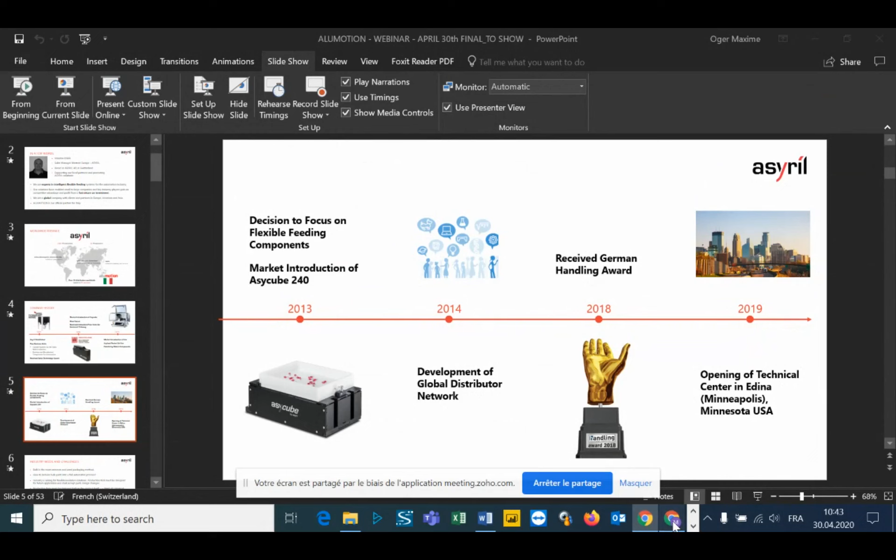Okay, Maxime, let's translate a little bit. One moment. Claudio, raise your hand. Claudio, devi dire qualcosa di importante? No. Quindi, una breve traduzione.

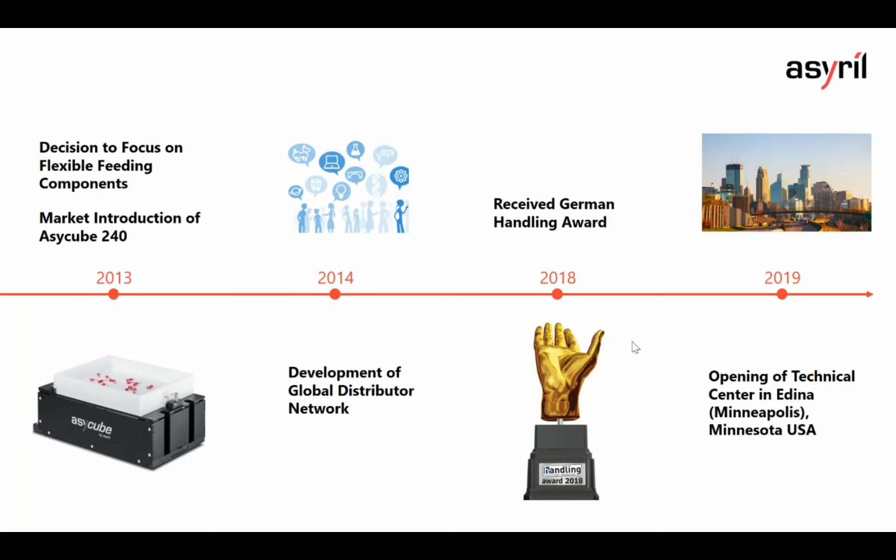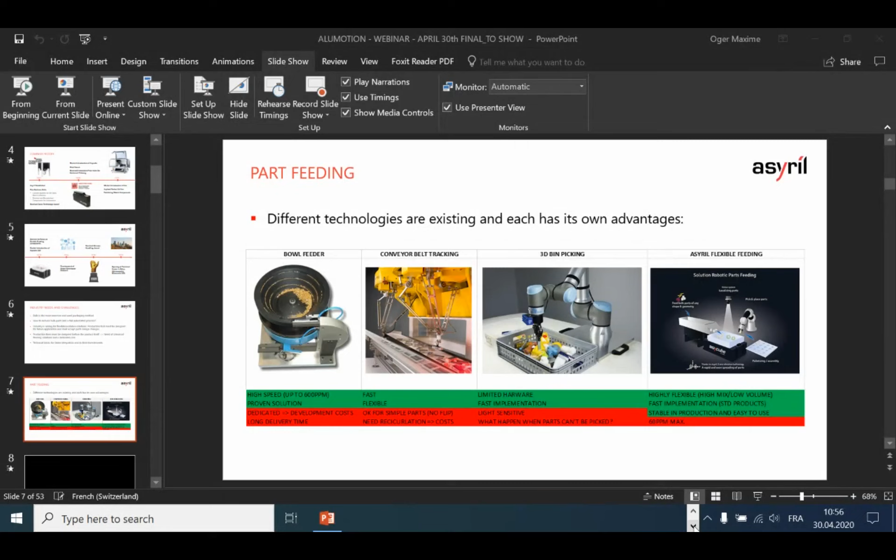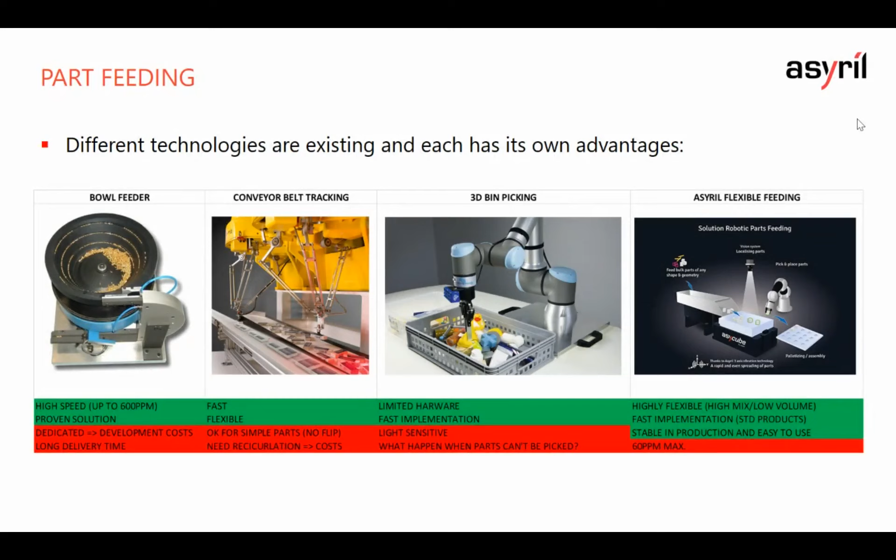So we'll continue with a video showing exactly how it's working. We can see here that's with a SCARA from Yamaha. We have an Asycube 240 with the vision system from Yamaha in this case. That's a demo built by Yamaha, which will be better now.

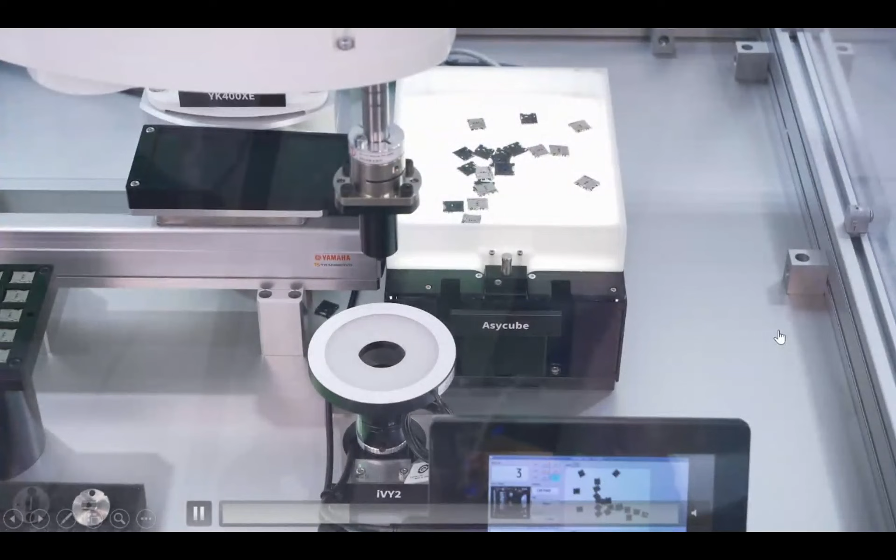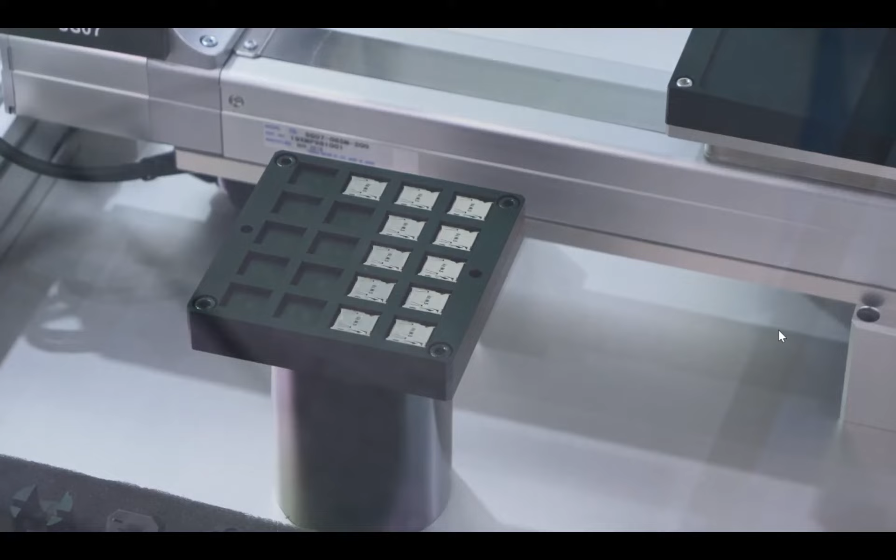So you can see the demo is showing how to feed electronic parts. That's basically SIM card sockets in this case, not so easy to feed with a traditional system. As you can see in this video, we can reach up to 45 to 50 parts per minute, but I think we can be a bit faster with some optimizations. There's always a possibility to put a second Asycube with one robot, so we're having two feeding systems with one robot. This way the robot never waits on the feeder, and this can help reach a much higher cycle time.

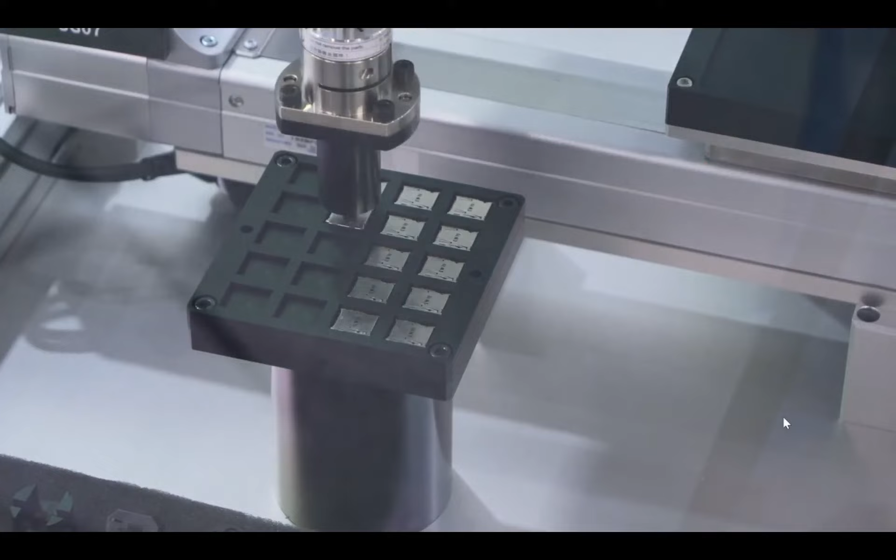So the question is, why do you need flexible feeding, and when do you need flexible feeding? As I was mentioning in the previous slide, high mix, low volume, and frequent production changes. If you need high flexibility, this is where, most of the time, we get requests.

The thing is, if you have low volume, most of the time people think, since I have low volume, I cannot afford an investment to do automation. But what if I don't think about only one assembly, but regroup 10, 20, 30, 40 assemblies with low volumes? I can get big volumes in the end. I just need the tool, the production tool, that allows me to produce all those references. So this is where we are most of the time used, for flexibility, definitely.

Fragile parts to be fed. If you have fragile parts, parts that don't like friction, don't like recirculation, don't like to fall down, parts where no scratches are allowed. I'm thinking about some projects, requests we had from the aerospace industries with electronic components, which at the end of production must be really clean and cannot have any scratches. So our system in this case can handle the parts very gently.

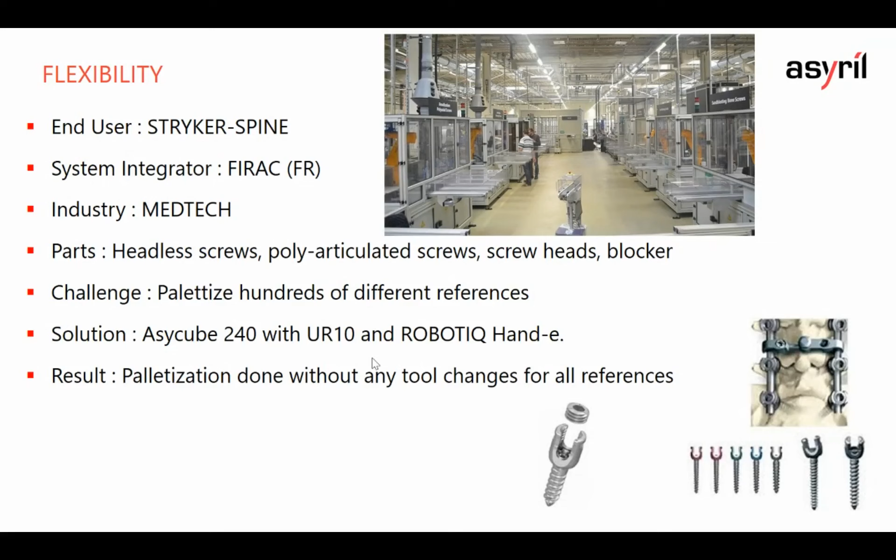Our target was to feed the parts directly after the CNC machine, put them into pallets, and allow the AGV to run the fully automated process afterwards. So we answered by providing an Asycube 240, using the UR10 and a ROBOTIQ Hand-e gripper. The result is palletization done without any tool change for all the references. We were able to do the pick and place and palletization of the 200, 300 references without any tooling change, just loading the software recipe.

Just to give you a better view, I will launch the video.

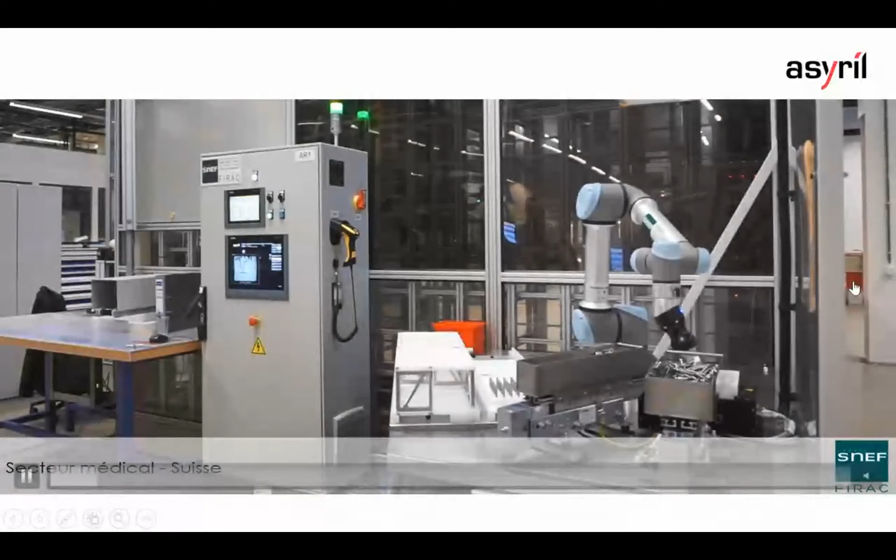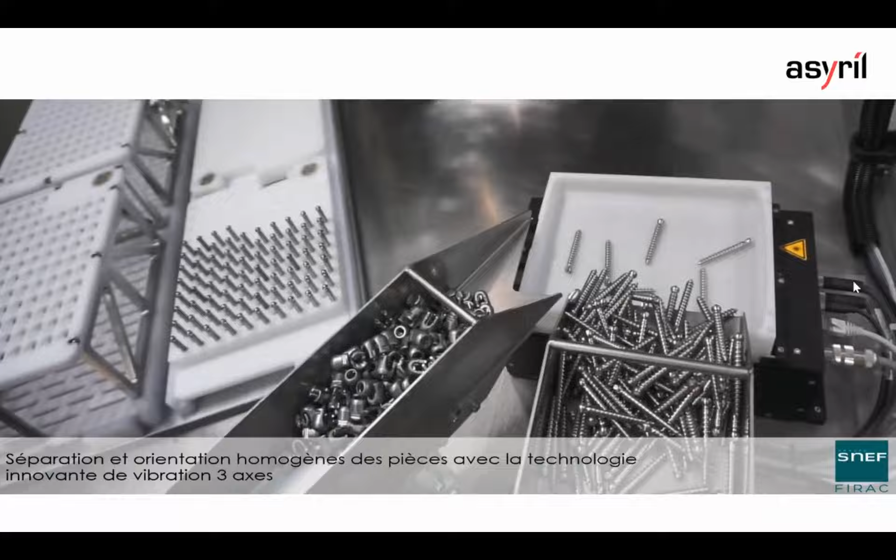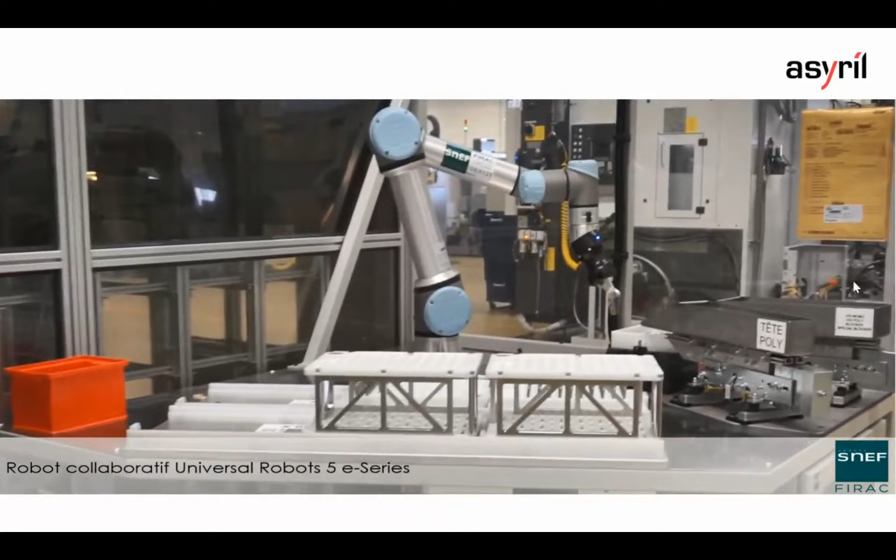The cell was made to be fully open, in the middle of the factory. This is something they wanted, to show to their potential customers. You can see the pallets here, we take the screw without any head, and there's the head on another feeder to make the palletization also for this. So the biggest challenge here was really to find a tool that allows customers not to have 200 different toolings to develop and stock, just one cell that can do everything. This is what we managed to achieve with the collaboration of the system integrator.

Another example of flexibility: the end user is a US customer providing electronic components. The system integrator is in Switzerland, called AATEC, and they are focused on developing machines for tape and reel applications. In this case, the end customer must provide tapes with many references of microchips from 0.3 to 10 millimeters in size, so very small components to be placed into tapes.

So we provided the customer with free of charge feasibility studies at first, to determine if it was possible to feed the full range and detect all the details on the parts, and to answer his request. The Asycube 80 was the ideal solution for this, with SmartSight, our integrated vision system, using Jenny-Science Cartesian robots.

The result is we are here in the low volume high mix category. The machine successfully addresses the wishes of the end user because we provide one machine that can handle hundreds of different references, so for him the investment is much less. That's definitely the big point for him.

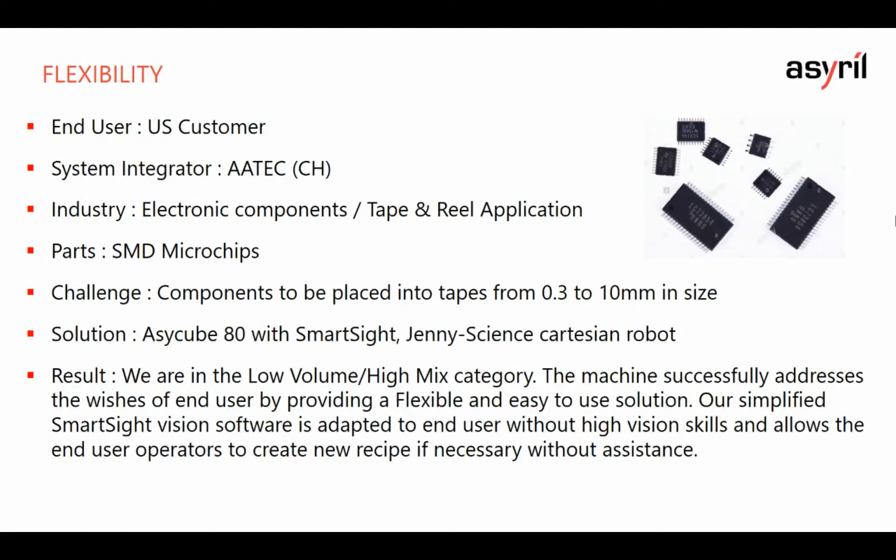So this is quite unique in the market, in feeding those parts. Most people think it is easy, but if you go to very small parts, you face different challenges compared to big parts. So we have definitely the experience to feed such small parts, and we know how to help them.

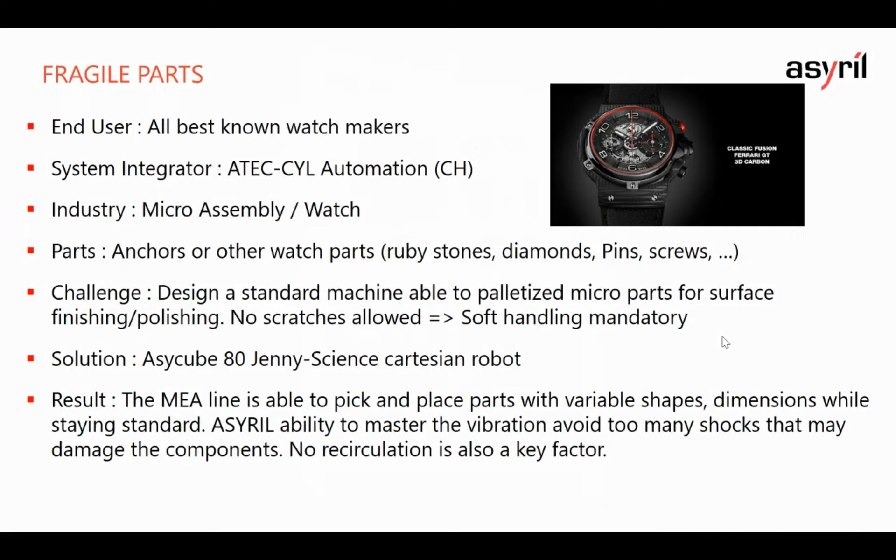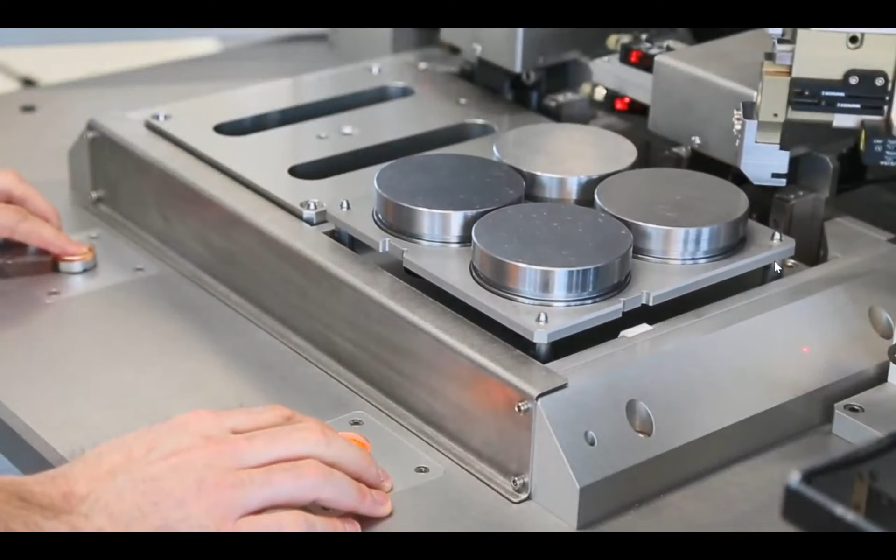So this is the full machine. If you see the metallic disc here, this is where the parts will be placed. We have some glue here, so the parts can stay very fixed on the disc. The vision system detects the orientation, gives permission to the robot, and of course we do the pick and place.

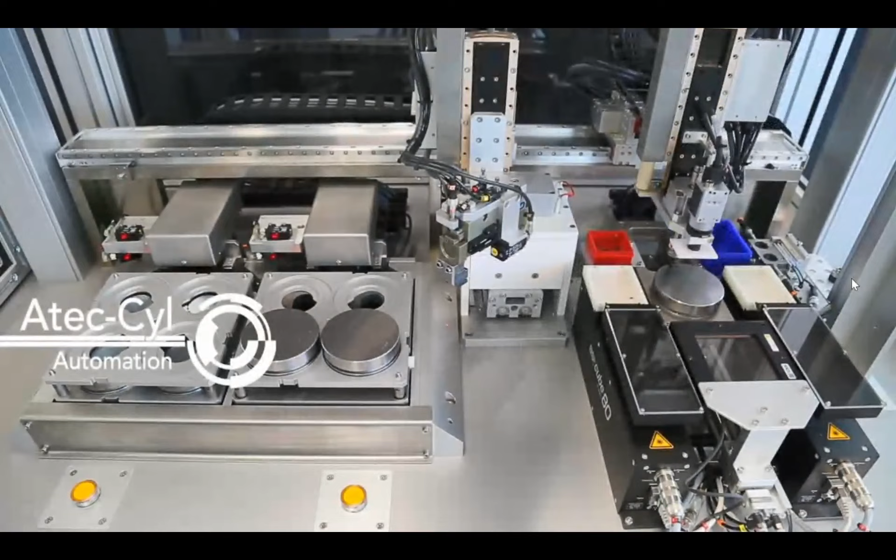So the next example is parts stuck in a bowl or into a rail. I take an example here from an end customer in the medtech industry, a major American company. The system integrator was IMA Medtech, based in Switzerland, but the headquarters of IMA is in Bologna, Italy. The industry, of course, is medtech. The parts are one part of an auto-injector.

Auto-injector is also a big boom in the medtech industry, with a lot of production change over the life of the product. The challenge here was one part of the auto-injector was adding soft touch overmolding, and this soft touch is not compatible with a bowl feeder or a linear conveyor.

The experience of the end customer in this case was, no, we don't want to use bowl feeders because we know we had some troubles in the past. So we need to find another solution to feed because we know there will be problems.

The other challenge was this line was designed first for manual assembly, but almost at the end of the project, the customer came back and said, finally we want to put robots and do automation on this part. So you need to put a robot, a feeding system, and a vision system into this area.

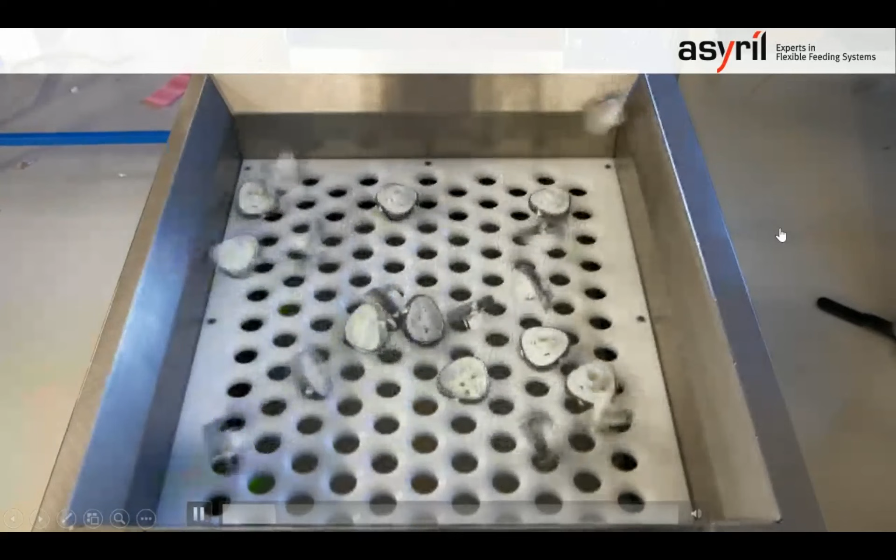So this was the parts. This is the specific plate we designed on the Asycube 530, which is our biggest feeder. As you can see, we designed the plate with holes that will trap the parts in the correct orientation, so we can see a number of good parts after each vibration. We take them, give the coordinates to the robot, then the robot gives the information that it's done and gives the order to the Asycube to set up a new vibration sequence.

Okay, this is quite unique.

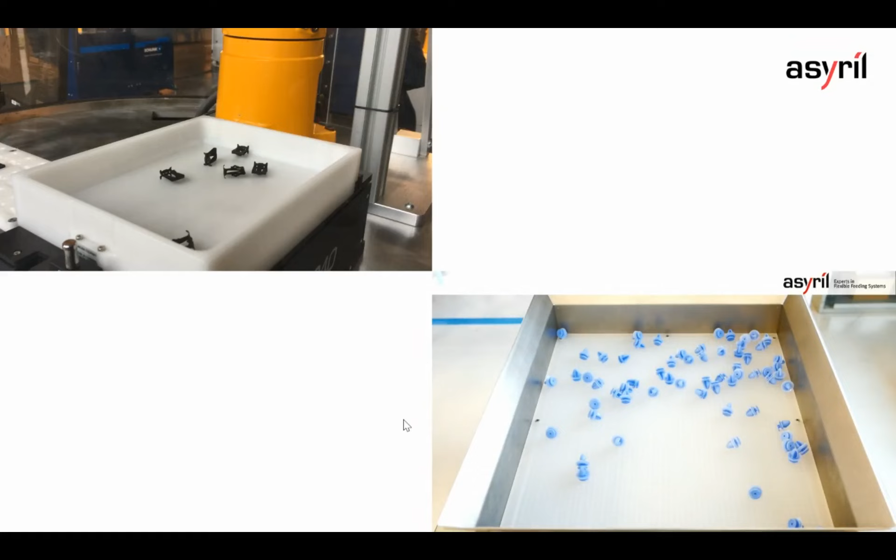But there is another option: using the 6-axis robot to pick directly into the Asycube, which makes the cycle time much more comfortable. You can see we can feed those clips easily. They call it a Christmas tree because it looks a bit like one, and it doesn't look very complex as a part, but it really caused most of the industry a lot of problems.

Questo invece viene da un altro ambiente che è quello dell'automotive. Immagino che li abbiate già visti, queste sono delle specie di spine plastiche che hanno diverse forme. Il caso era quello che c'è una macchina o una pressa a iniezione che produce queste cose e poi subito dopo c'era il montaggio eseguito a mano.

Se il montaggio aveva dei fermi, ovviamente la macchina doveva fermarsi. Allora hanno pensato di fare un buffer, ma per fare il buffer dovevano in qualche modo andare a mettere le parti in modo regolare, cioè creare dei pallet. Questo è stato fatto con l'utilizzo di un vibratore Asycube. Vedete che le parti sono di differenti tipi: in alto a sinistra una parte metallica, in basso a destra una parte plastica.

Si è utilizzato lo stesso tipo di vibratore con dei piatti differenti. Vedremo a breve che uno dei punti vincenti è quello di poter creare dei piatti ad hoc per i diversi tipi di componenti, per adattare meglio la superficie al tipo di componente. Un'altra cosa da notare è che Asyril si è interfacciato con Universal Robot, con degli SCARA, con uno SCARA di Yamaha, in questo caso con uno Stäubli: è una piattaforma aperta a diversi tipi di robot brand.

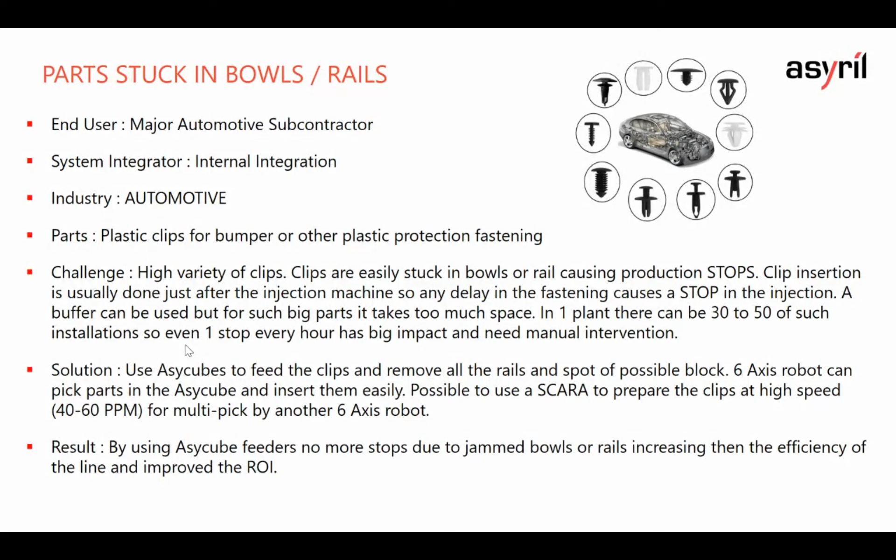They decided to go with Asyril and also Universal Robots in this case. The good thing for them is they managed to integrate our feeders with the Universal Robots in less than one week. Just an 8-people company, very small, managed to do this in one week without really big experience in robotics. I'll show you the video right away.

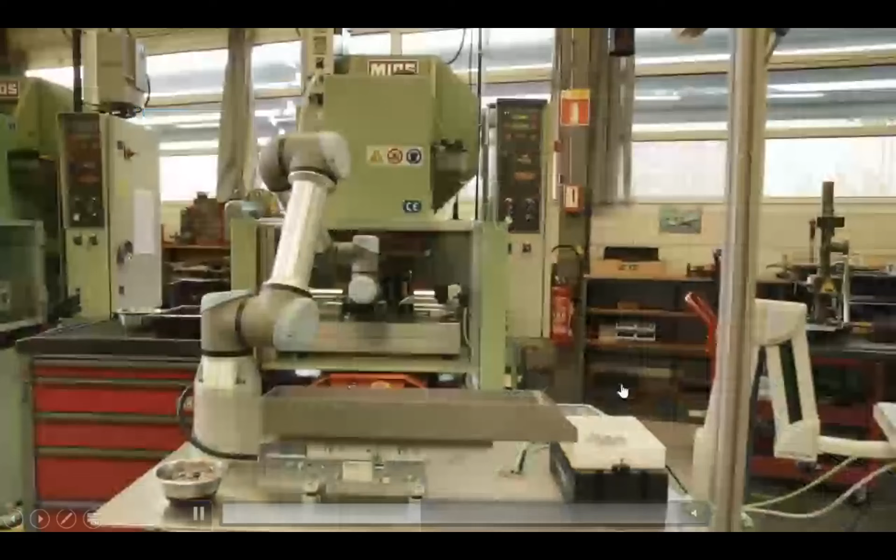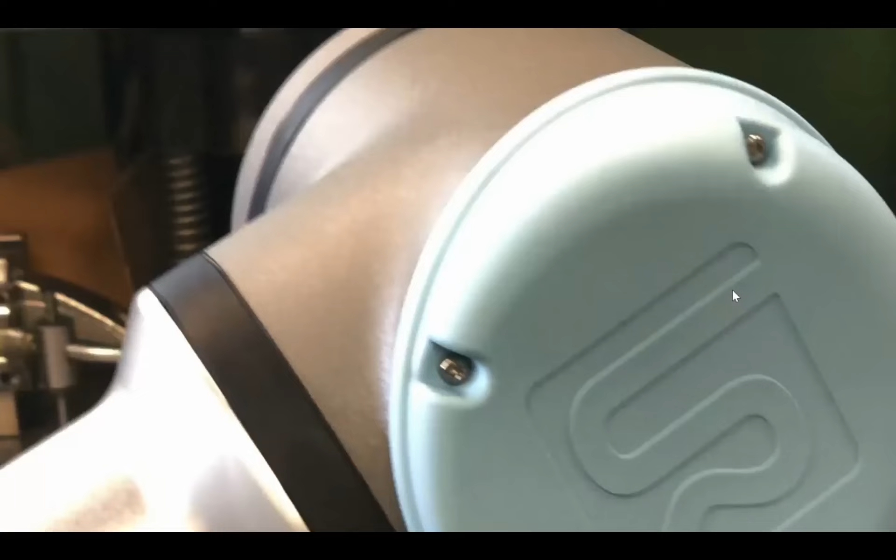So you can see here the feeder loading washers into a press. The good thing here was the UR ecosystem—you can find everything on the website, and the plugins we developed to ease the communication were really the key.

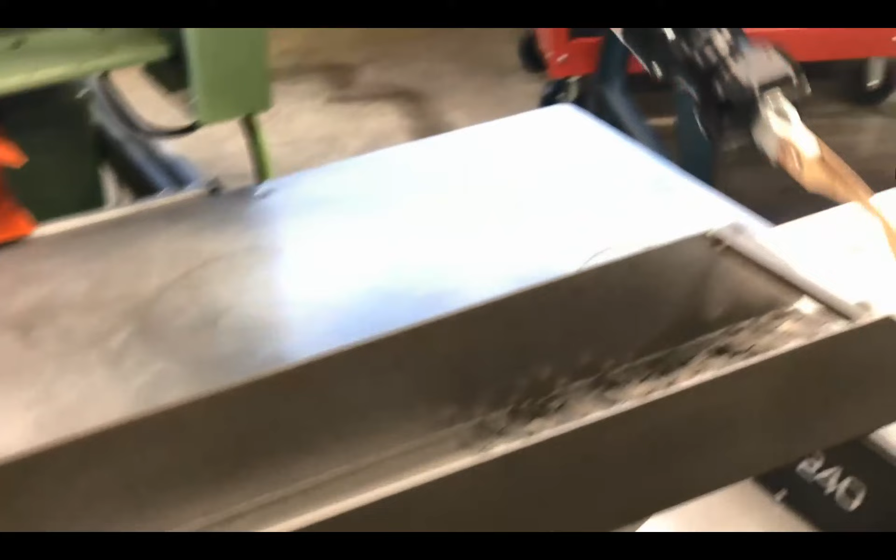Questa è una cosa che ci è capitata spesso, quella di andare a manipolare delle rondelle o degli oggetti simili. In questo caso ci sono diversi componenti, il fatto di utilizzare un robot collaborativo di Universal Robot, di poterlo trasportare in diversi punti dell'azienda grazie ai carrelli, il fatto che la cella rimane aperta, e grazie al sistema di URCaps, che immagino molti di voi conoscano, è stata facile l'integrazione perché la comunicazione tra Asyril e Universal Robot è già strutturata e testata, quindi ci si è concentrati sulla ricetta di vibrazione e sulla ricetta di visione artificiale.

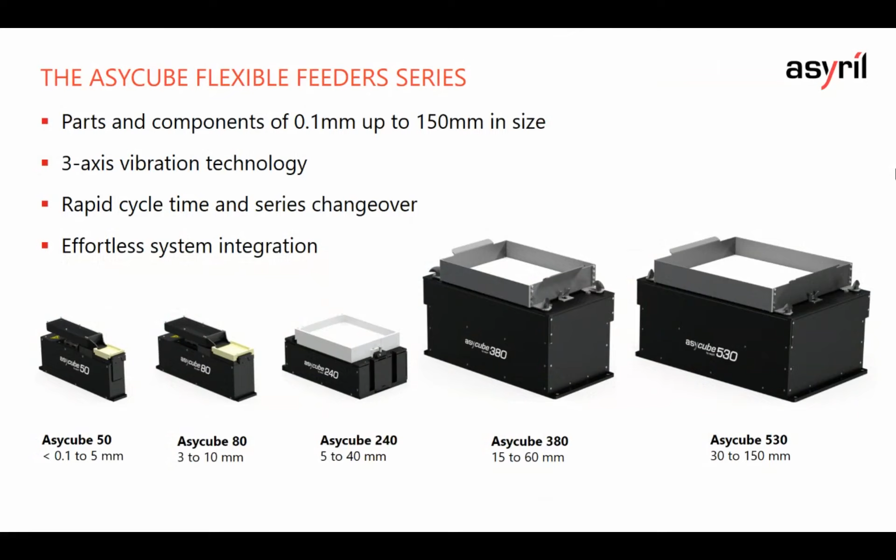So, I suggest maybe to go to the live demonstration, Fabio. Yeah, I prefer because we take more or less one hour, and I think that we have to go on the real part. Yeah, okay. So we can start now.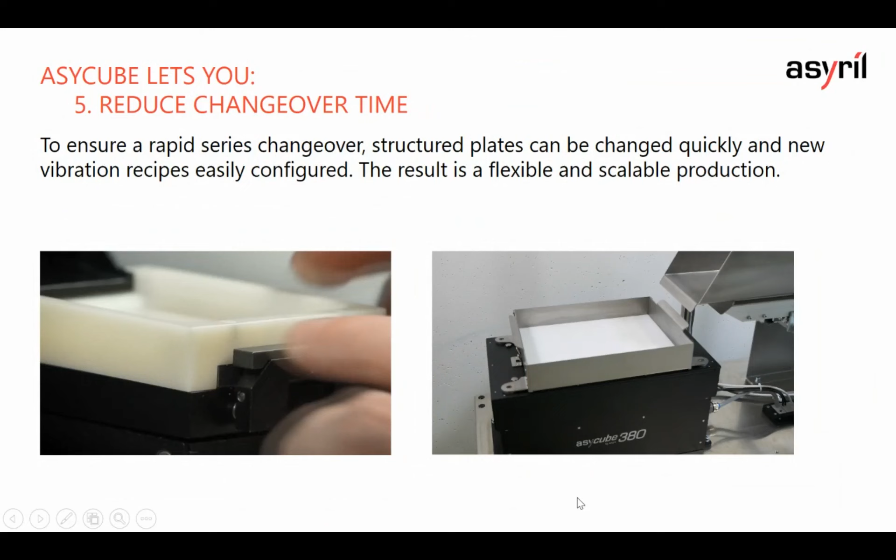Maybe you can give the lead to Livia. Maybe it's important to underline the part about changing the surface of the plate. I think that's a very important topic point, if you can give an overview about that, because I think it's important. Okay, I will take the lead. Make present. Okay.

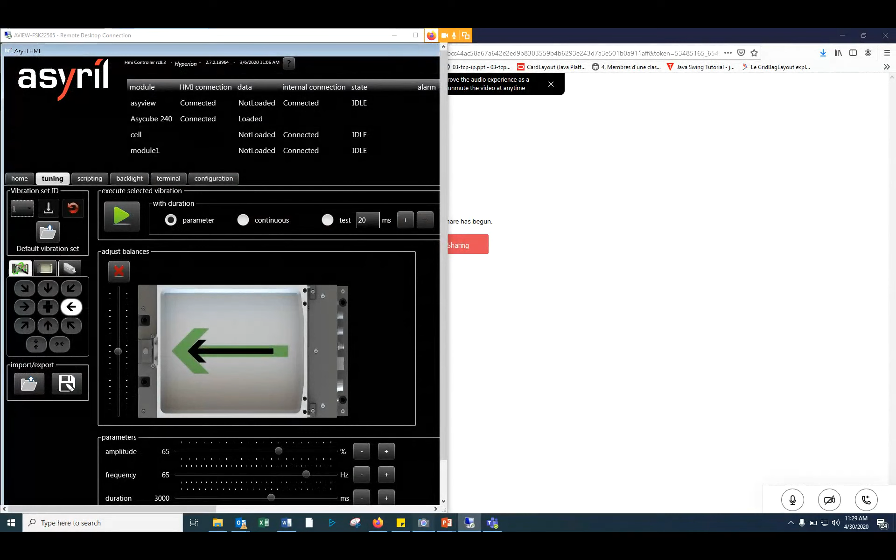Do you see the two screens, on the left the HMI, and on the right the Asycube? Perfectly. Quindi, ragazzi, per tutti voi arriva la parte pratica in questo momento. Andremo a costruire diverse ricette di vibrazione e a vedere come si comporta il sistema.

Ok, Livia? I will make a presentation of two of our products. The first is the Asycube. So this is an Asycube, I will show how to tune the vibration and how to use it. In the second part, I will show how to make a vision recipe with the SmartSight. The SmartSight is the Asycube plus our vision solution. Fabio, I will let you translate this part.

Allora, adesso proviamo a fare delle demo di due articoli. Uno è Asycube, che è la piattaforma vibrante, e l'altro è SmartSight, che invece è il loro sistema di visione completamente integrato. Quindi cercheremo di fare una ricetta da zero.

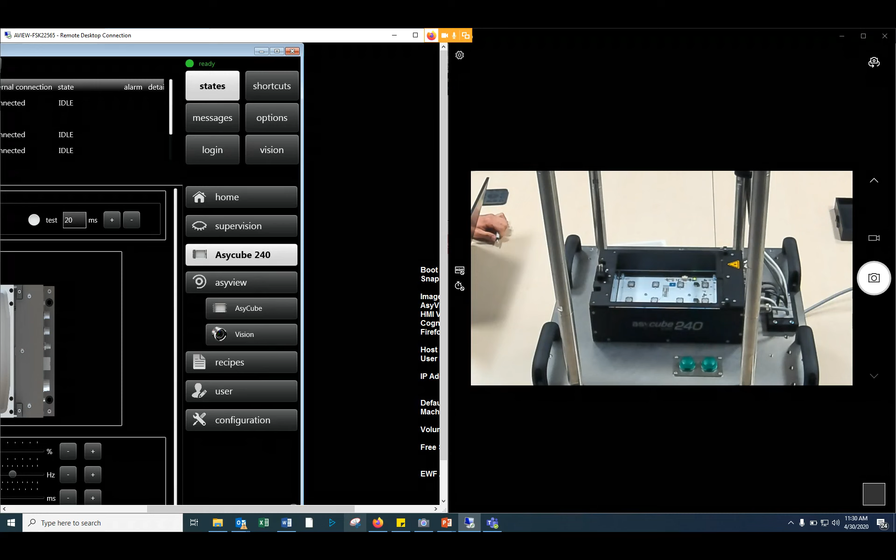Okay, so this is an Asycube. When you receive it at your factory, at your place, you will also receive the HMI installer that you can install on any computer that runs Windows. So this is our HMI, and the HMI for the Asycube is just for configuration purposes. Once you configure it, you can unplug the computer and just use the Asycube on its own on the product line.

The Asycube is composed of 4 actuators located at the 4 extremities of the Asycube, and this is the actuator that we make vibrate to move the part. If we make these 2 actuators work, the part will go this way.

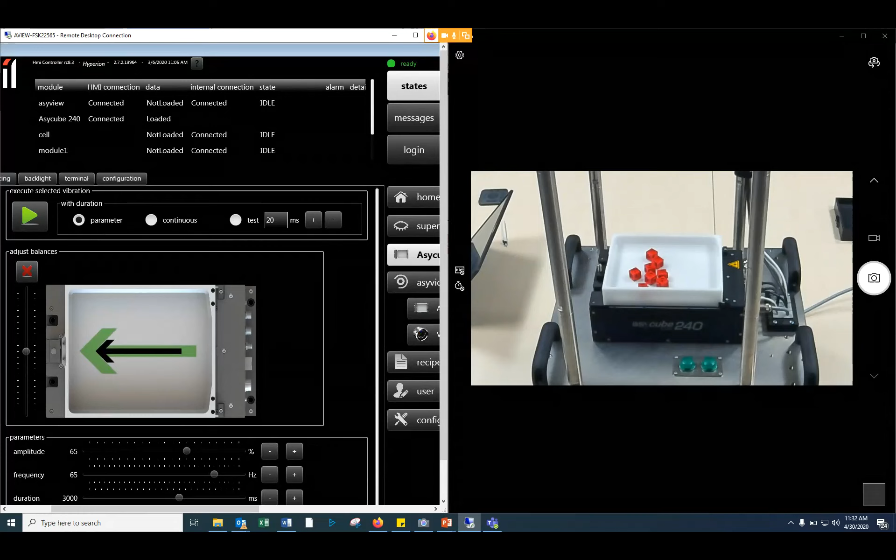Okay, you can start with the recipe or the parameter of vibration. Of course. So inside the Asycube, there are two main things we can configure: the vibration set and the sequence vibration.

I will start with vibration set. The vibration set informs the system how it is supposed to vibrate, with which parameters: amplitude, frequency, and duration. There are 26 vibration sets saved inside the Asycube.

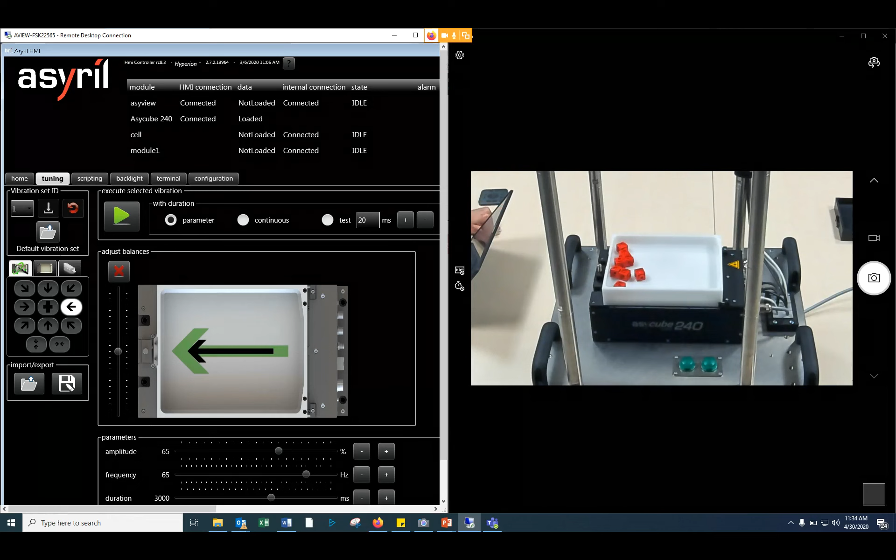So for the forward movement, for example, for each movement we have several parameters: the amplitude, the frequency, and the duration. The first step I like to do when parametering an Asycube is to find the frequency of resonance of the part I want to feed.

To do that, I put the amplitude very low, around 20, and I make the Asycube vibrate continuously. Then I change the frequency. As you can see, just moving the frequency makes the part react in different ways.

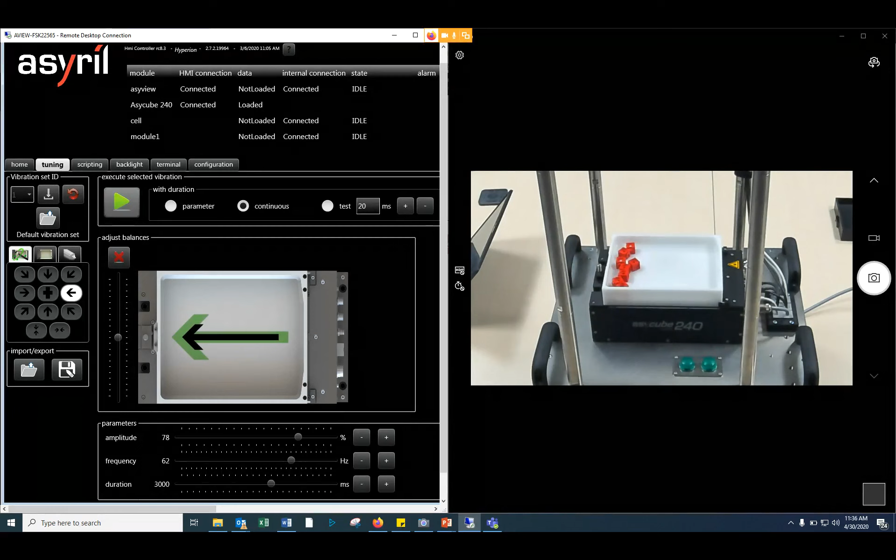So, as you can see, the forward movement to go from one extremity to the other takes less than 3 seconds, maybe around 2.

I'll continue. Let me try again. Yes, around 2 seconds. I can try to optimize the movement further.

It's tricky to configure an Asycube. You need to try different amplitudes and frequencies to find the right one. So, for example, those parameters seem fine. I think I'll decrease the duration.

Okay, something like that. If the parts were delicate or fragile, I could choose not to work with the resonance frequency. I will now purposely decrease the frequency, and I'll also decrease the amplitude a little bit.

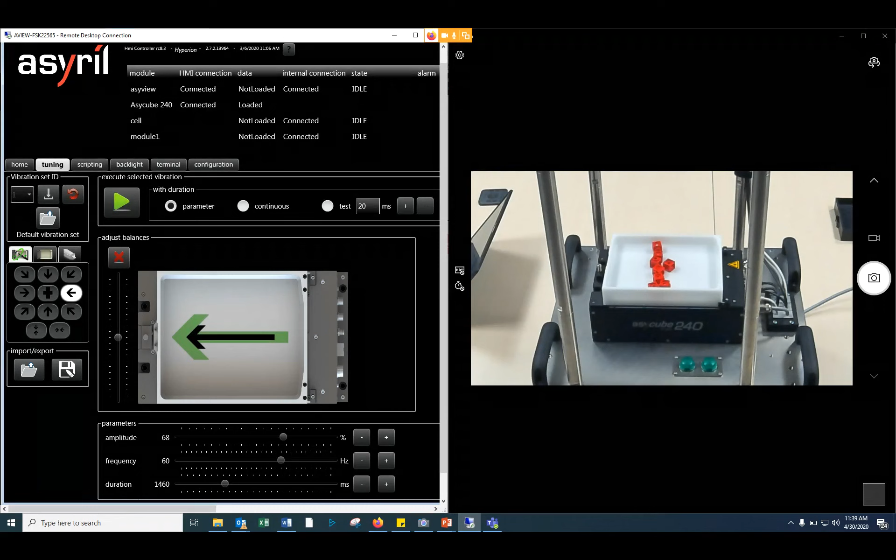Quindi prima ottimizzazione dei tempi, anche per un problema di tempo ciclo, e poi trovare la vibrazione giusta che permetta l'orientamento corretto per fare poi il pick del robot.

So I will do the same for the backward movement. So as you can see here, I choose parameters where the movement are smoother. So for delicate parts, it could be useful. It could be the right parameters.

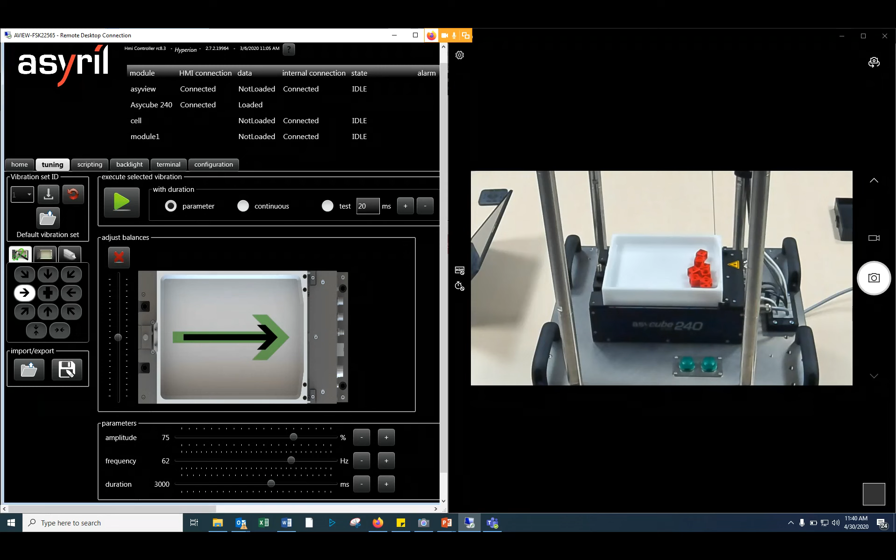Now, if it's not delicate parts and I want to move the part faster, I can, for example, put a little bit more amplitude, work around the frequency of resonance, and now the duration for the part to go from here to here is lower. It's better. The duration is better. I will need to do this for every movement.

I will show the last movement, the flip. The flip has two main uses. It's made to change the orientation of the part if there are several orientations, and also to spread the part on the Asycube. So I will try with some parameters.

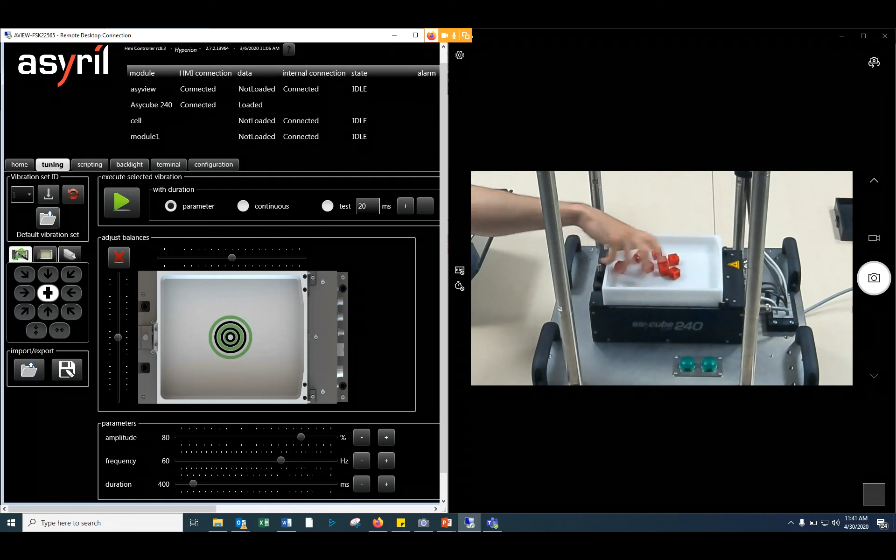For example, like that. Maybe I can put more frequency. For example, here it could be fine. The parts spread all over the Asycube. If I wanted also to flip them, I could put a little bit more amplitude. Voilà, for example, like that.

Ok, quindi avete visto un po' la strategia: cerca di raccogliere le parti verso il centro senza farle vibrare troppo, perché mentre c'è la traslazione le parti si toccano, quindi potrebbero rovinarsi.

Una volta che sono arrivate verso il centro, vedete, ha premuto il pulsante più, vuol dire che in qualche modo si cerca di farle saltare, e si fanno saltare dal centro verso l'esterno, e toccando l'amplitude c'è la possibilità di farle saltare più o meno in modo deciso.

Ok, ragazzi, vi vedo molto calmi sulle domande. È tutto chiaro? Non avete domande? Al di là del 'ho capito, non ho capito', avete idee di utilizzo, dubbi su possibili utilizzi?

Nessuno? Ok, proseguiamo. Ok, Vivienne? Okay. Once I parameter all the movements, I can just

flash the vibration inside the Asycube. So all the changes I made here are going to be saved inside, and I have, as I said in the beginning, 26 vibration sets.

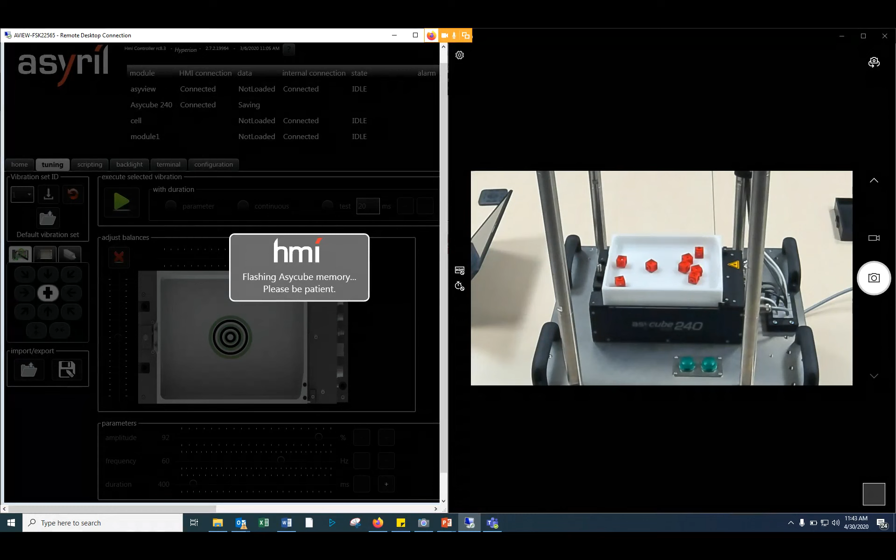So I can save up to 26 different kinds of movement. For example, the vibration will be for those parts. I will use the number 2 for those parts, and everything will be saved inside the Asycube.

At the beginning of a production, I will just select. I will just send a command to the Asycube to say, now you're gonna use the vibration set number 1, 2, 3, 4, 25, etc.

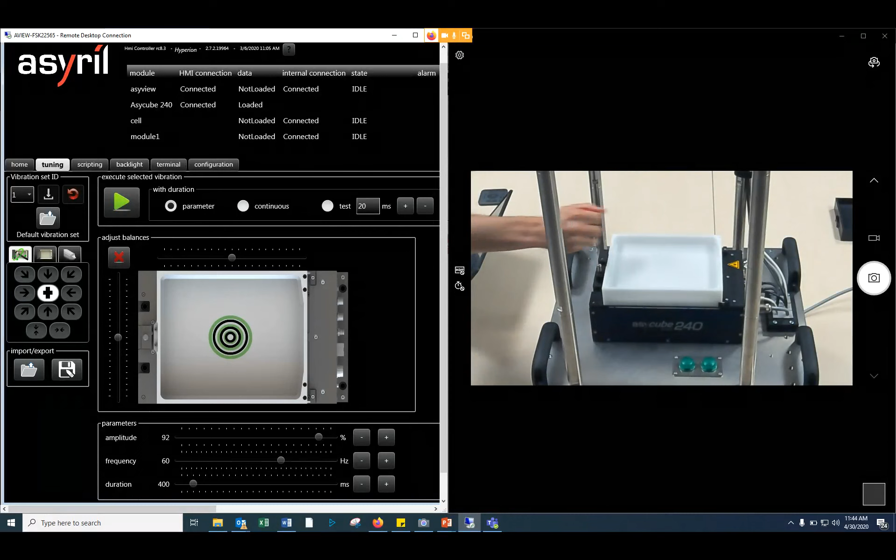Ok, Fabio? Sì, allora, come aveva fatto vedere, questo è il discorso delle ricette, no? Quindi voi potete memorizzare fino a 26 ricette di parti differenti per andare a decidere i tipi di vibrazione, anche cambiando di molto i componenti, le dimensioni, il materiale e il peso dei componenti.

Ok, Vivienne? Okay, now I'll go to the sequence. So in the vibration set, we manage how the forward movement should work, how the backward movement should work, etc. In the scripting part, we're gonna inform the system which sequence we want to use. Do I want to make a forward and a backward and a left, right, and then a flip? Which kind of movement do I want to use?

Most of the time, we advise our customer to use an intelligent sequence. For that, we need feedback from the vision system. It is automatically done if you use our vision solution, but you can also do the same with your vision solution.

Here we have a classic sequence. This is for the hopper. We can command up to 2 hoppers with the Asycube. What I'm saying to the system is, please activate the hopper in order for it to feed 15 parts on the Asycube. 15 parts is a number of parts we will want ideally on the Asycube.

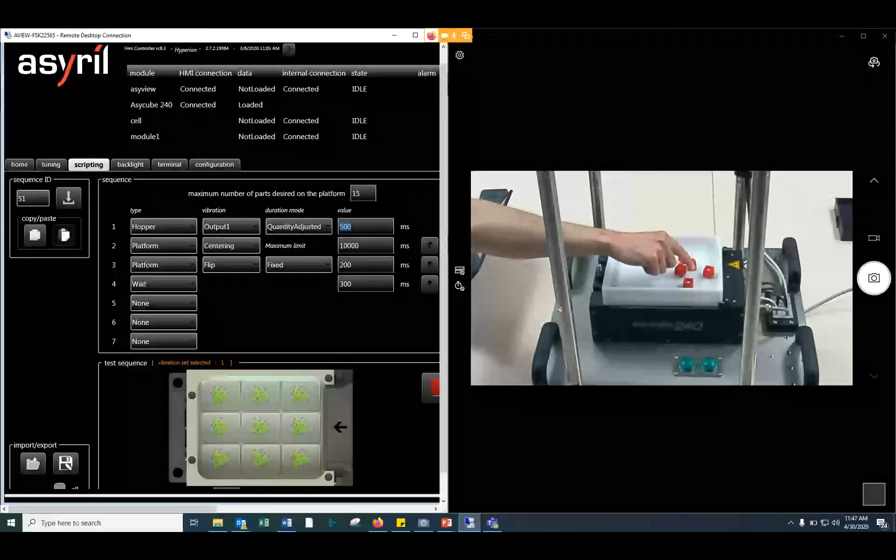Then the second movement is centering. Centering is an intelligent movement, also with feedback from the vision. Let's say that at the end, the parts are here. The vision will inform the Asycube that most of the parts are here, and for the part to be centered in the middle of the Asycube, it requires a forward movement for 10% of the time that I indicated here.

And then we do a flip. A flip, as I said earlier, is to spread and change the rotation of the part. And at the end, there is always a wait duration for the parts to stabilize themselves before a picture is taken.

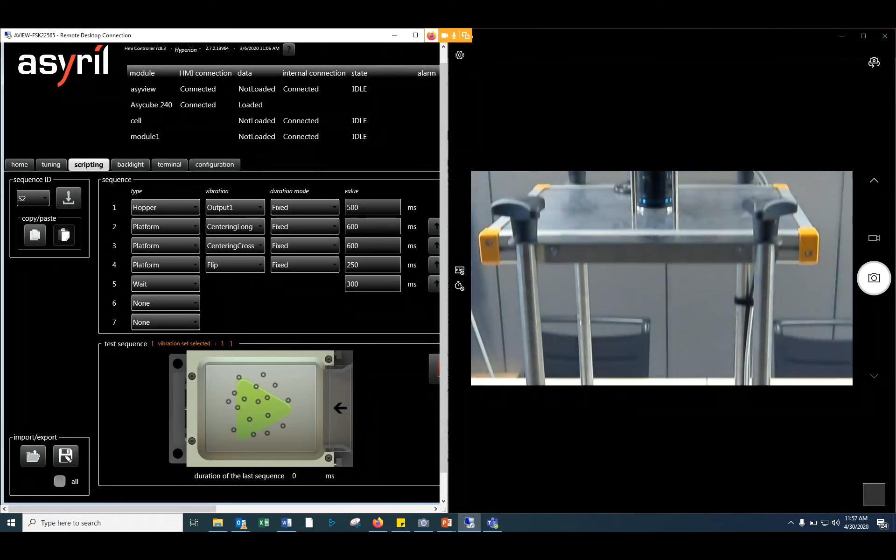Okay, now for the SmartSight solution. The SmartSight is the Asycube plus a camera - this kind of camera. There is also a computer that goes with it; you don't see it, but it's under the Asycube. So this is the SmartSight.

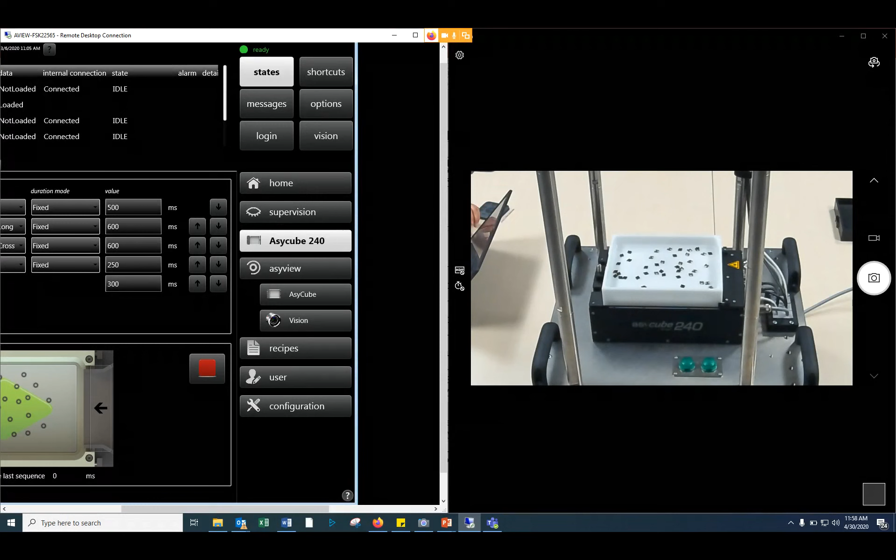Okay Vivian, so now I'm gonna show how to make a vision recipe. So how to teach the vision part.

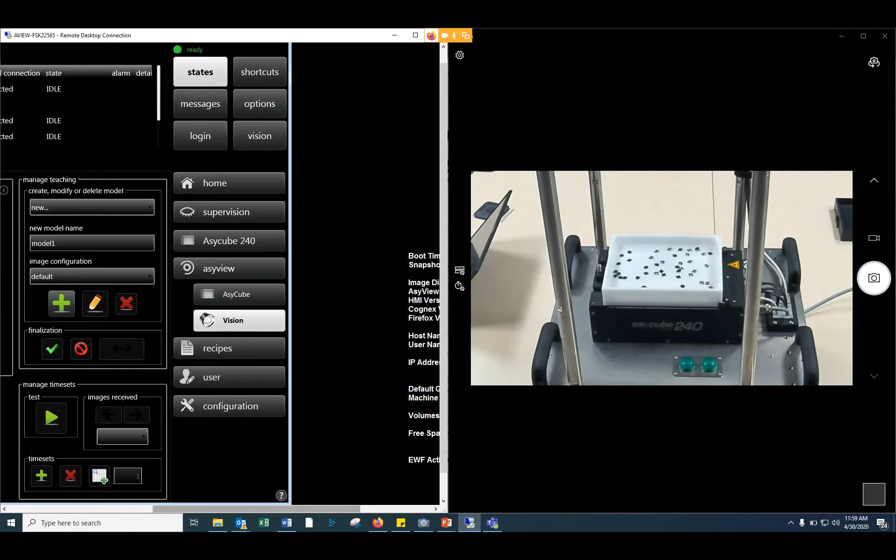The HMI is already installed on the computer that goes with the SmartSight. It's the same HMI, you just have more options. So you go to vision, and it will show how to make a vision recipe. The algorithm is like this schematic.

So the first step is the image acquisition. The first step is to take the picture. I can play with the exposure time. I can choose the exposure time I want. 8 seems fine. Okay, so this is the first step, I take the picture.

The second step is pre-localization. Pre-localization is a fast way to identify potential candidates. It's not very precise, but it's very fast. And we want at this step to eliminate all the parts that we already know are not a good part.

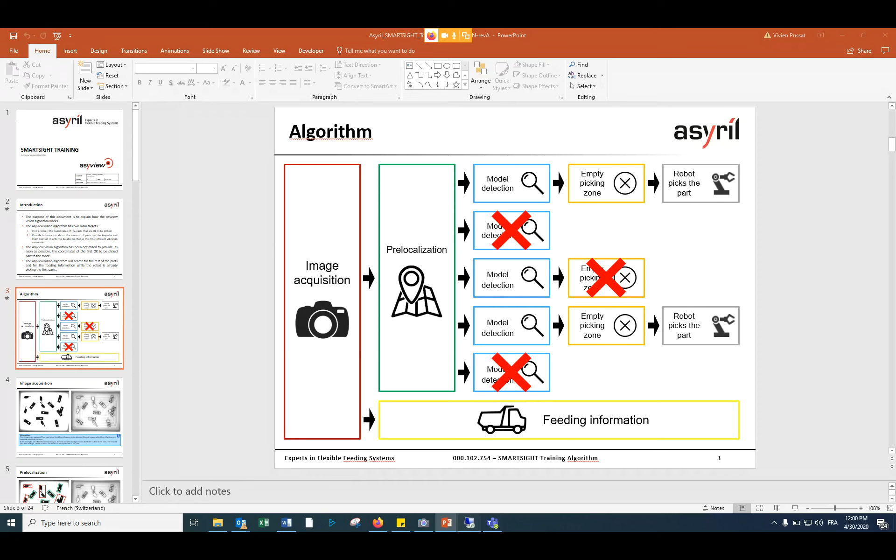To do so, I will switch. So the pre-localization part uses a binarization, so it's really simple. What I want to do is eliminate the parts that I already know are not good. For example, the system recognizes the blue part, the contour of the Asycube, as a potential part.

We already know it's not a part, so I can put some filter. For example, a good part has an area around 52. So I'm gonna just put a filter and say, okay, I just want to include parts with an area between 42 and 60. I don't need to be very precise at this moment.

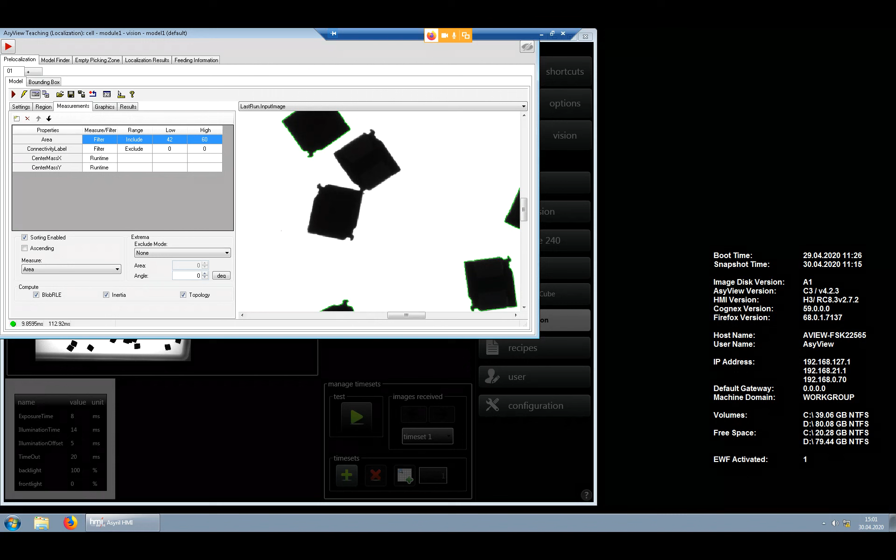As you can see, the border is eliminated. We also have some parts that are eliminated because they touch each other, and we already know that, for example, this part, the robot won't be able to take it because it's in contact with another one. So this is the second step, pre-localization. It's really easy and really fast, but not precise.

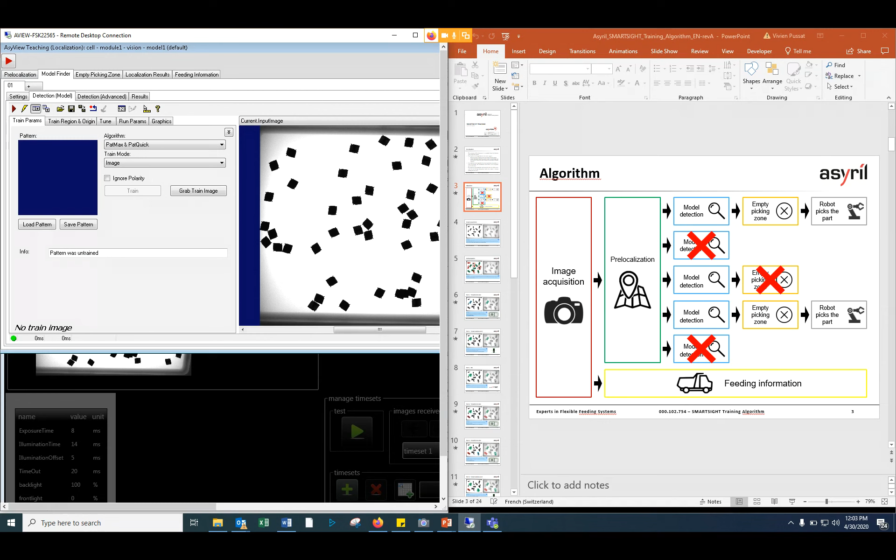So here, teach what a good part is. So for all, this is a good part.

And the algorithm uses a Cognex algorithm, and it detects the contour of the part. So the algorithm detects the green line that you see there. So the good part is now taught, and I'm gonna just put some parameters. For example, the angle, I want to detect every angle possible.

And for the sake of demonstration, the accept threshold is a threshold in which the system decides what a good part is and what is not a good part. So the algorithm is now taken, and as you can see, we detect all the good parts, and the bad parts are already identified. So here we decide which is a good part and which are not.

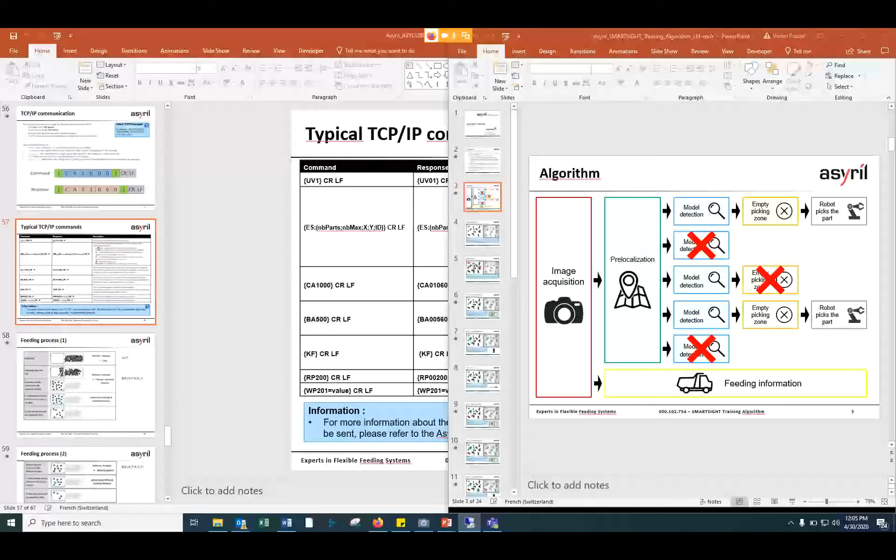The next step, after the model finder, is the empty picking zone. The empty picking zone region is to simulate the gripper, so it's to simulate your robot.

For example, if you have a mechanical gripper, you can indicate to the system what is the size of this mechanical gripper. So this second rectangle that I'm moving represents the gripper, and I can choose the size.

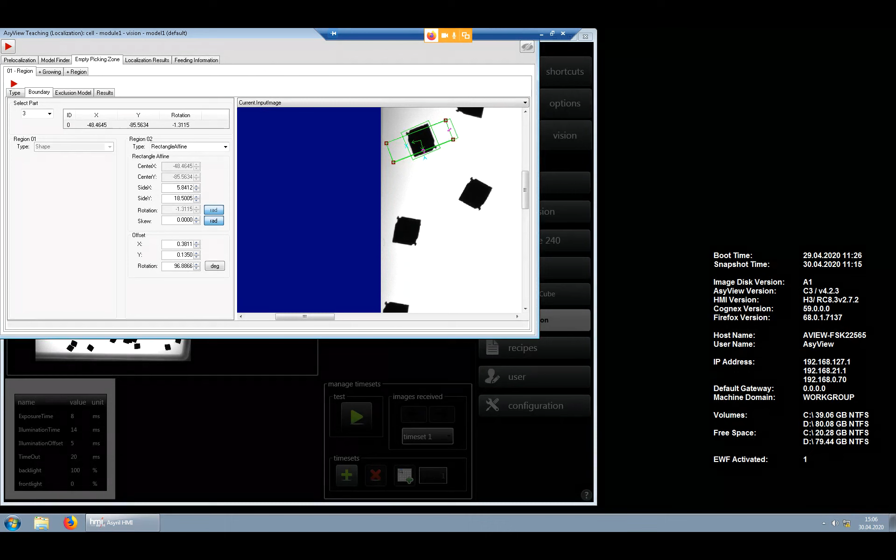I'm telling the system that the robot will take the part with a gripper of this size. So now it detects which parts are available for the robot to take, and which parts are not because they are too close to each other.

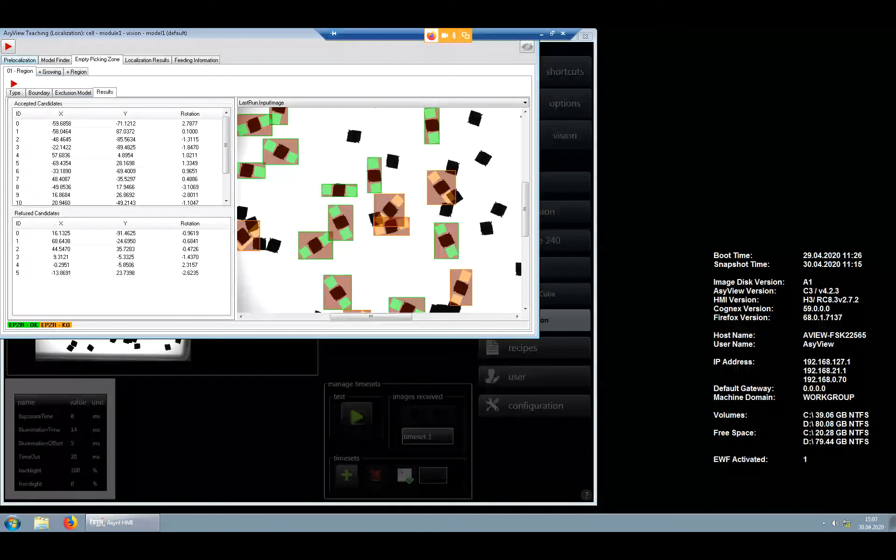Okay. So by going through these three steps, at the end we have the robot, and we have the parts that the robot can take or not.

There is another thing we need to do, which is the feeding information. The feeding information is basically the same algorithm as the model finder, but what we want to do here is detect the good parts, but also the parts that are not good. The purpose is to count the total number of parts, good or not, there are on the Asycube, and this information will be useful for the vibration sequence that we saw earlier.

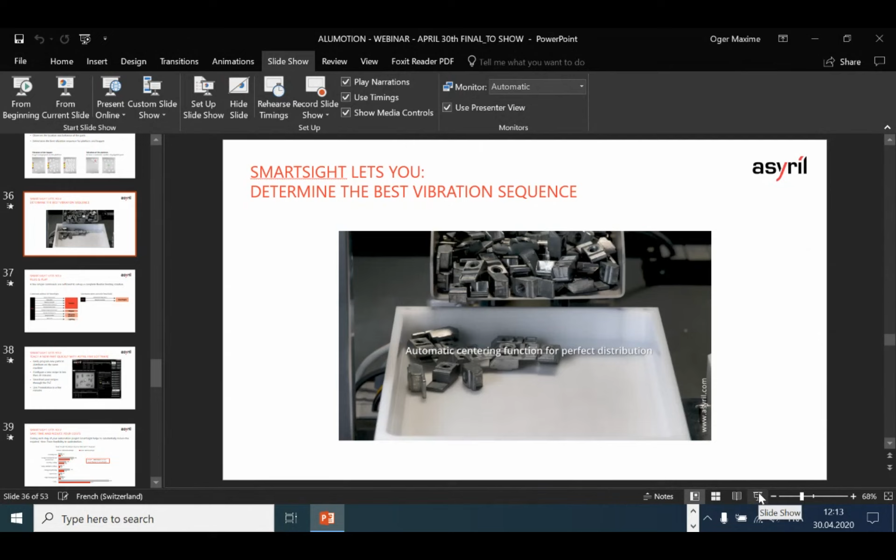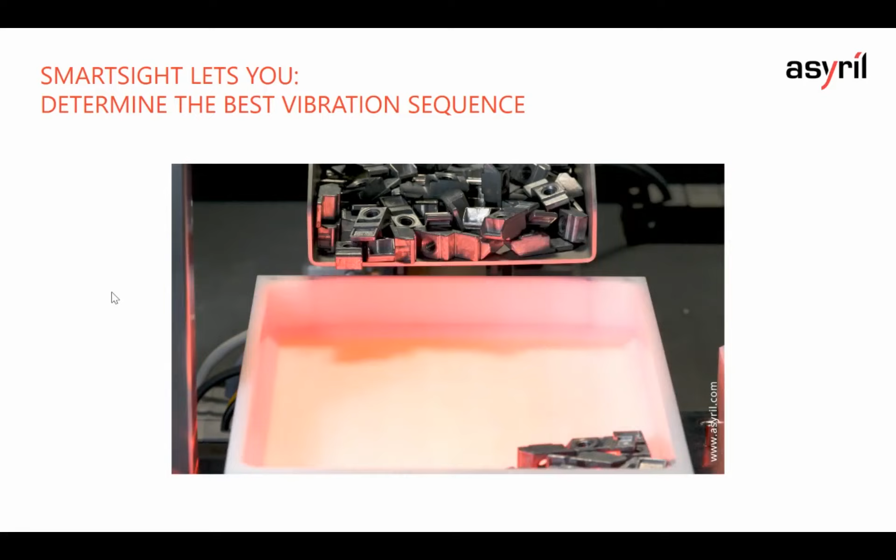So just a few words about the SmartSight. You have seen the demonstration of how it is to program a vision. I would like to say a bit more about the automatic function, what we call smart. Just a short video to show you that the vision sees the parts are not in the right position and automatically sets the vibrations to the input. This is the effect you can see in real application. This avoids, of course, production stops, parts being stuck on the platform, and operator damage.

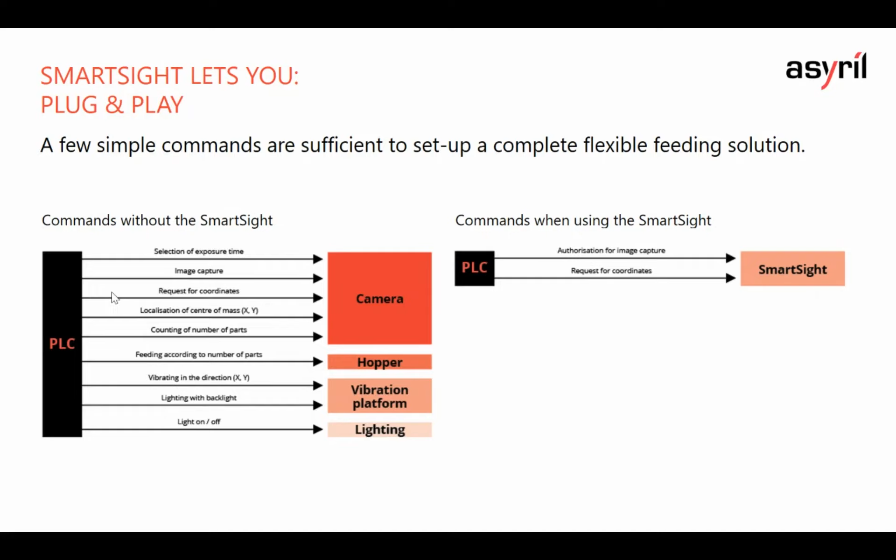SmartSight is also a full package. So the communication with either the PLC or the robot controller will be much simpler if you go with SmartSight rather than using Cognex, Keyence, or SensoPart, or any other vision system. The fact that we have integrated all those functions will make your life much easier and faster for the integration. Just to give you an idea, to get the exact same function that SmartSight is offering, how smart it is, how it handles the vibration, to get the exact same result with a third-party vision system, you would need around 240 hours of engineering.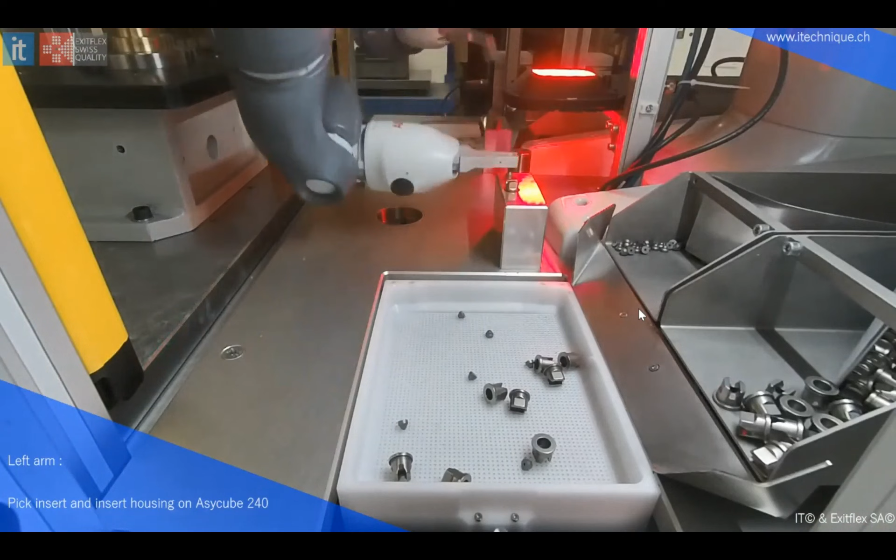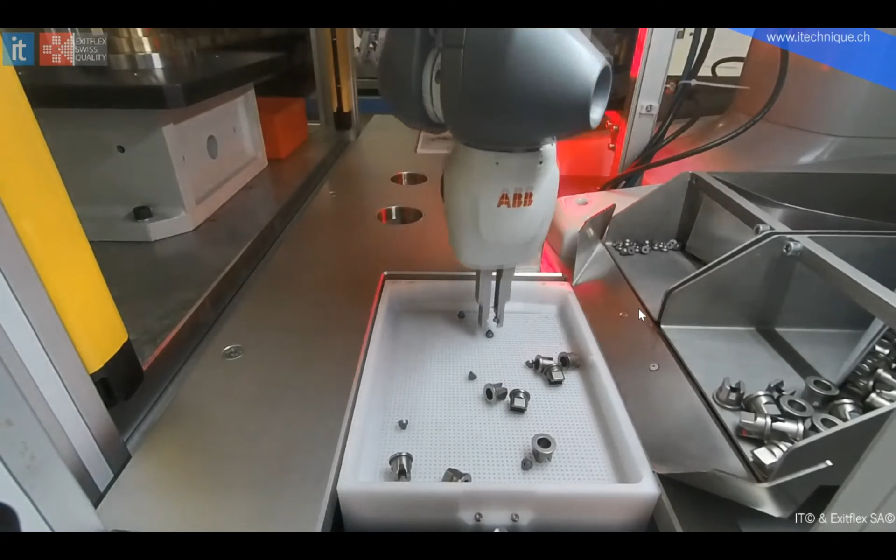Sorry. Just a last example about the possibilities of the SmartSight, as you can see on this video, is to feed two parts at the same time, two different designs at the same time on the Asycube. Of course, some conditions have to be met to make it work, but it can also help you lower the cost. For example, in this video, there were 4 parts to assemble for a spray nozzle. We did it with only 2 Asycubes and our SmartSight, so we basically saved the cost of 2 Asycubes for the complete assembly. It was very important because the budget was very limited for this case.

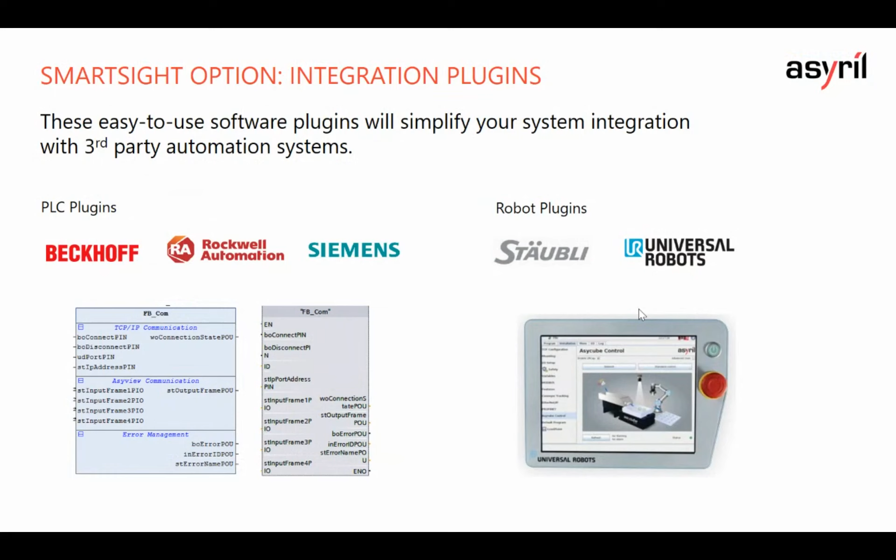So I will finish on the SmartSight with the plugins. It's really software, not just something we made once with a Stäubli robot, with Universal Robots, or with Beckhoff or Siemens PLC, saying it's working with just a piece of code. That's real software developed in collaboration with all those big companies. So that's something really strong, something we have tested and proved. It can really help save time for the integration.